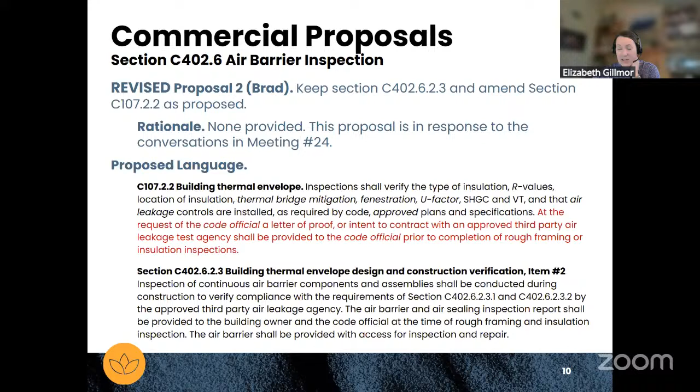Awesome, thanks Kevin. Elizabeth, then Ron. I'll share that Denver's recently instituted a really similar policy. They require two documents to be submitted at permit: one is an actual air barrier review performed by a third party, with specific qualifications set by Denver. The second is a letter that rings very similarly to Brad's suggestion here, signed by the third party, not the architect. So I think Kevin made a great point there. I do like Tim's suggestion that the scope is outlined, which could be really helpful for the contractor in knowing when things have to happen. I know just enough about this to be dangerous, but we do have this service at our company, and what I'm learning from the folks who do that is that timing and coordinating with the contractor during construction is really important. So some of Tim's suggestions about sequencing could be valuable to achieving success with air leakage.

Ron, jump in. I like the idea Tim put forth of having a letter coming from the testing contractor. When I've dealt with this, I've wanted the person or company doing the testing to tell me what they're going to do and confirm they're on the project. The signatures by the building official, owners, architects, and so forth are just acknowledgement that they understand the plan, not that they're taking any responsibility for the work. It demonstrates a level of coordination, that everybody knows what's supposed to happen and what's been told on the permit documents. But it doesn't confer any responsibility to the architect beyond acknowledging they received that letter and know that's the plan.

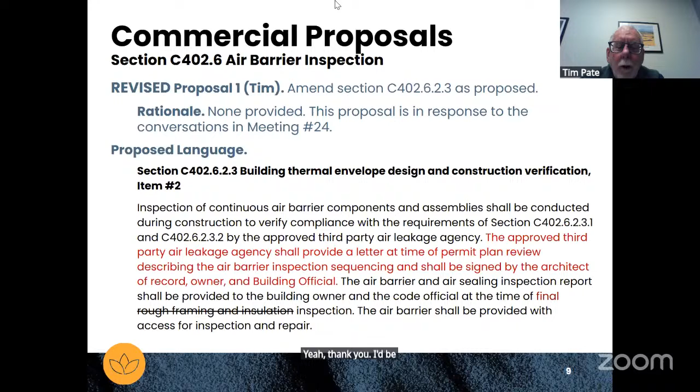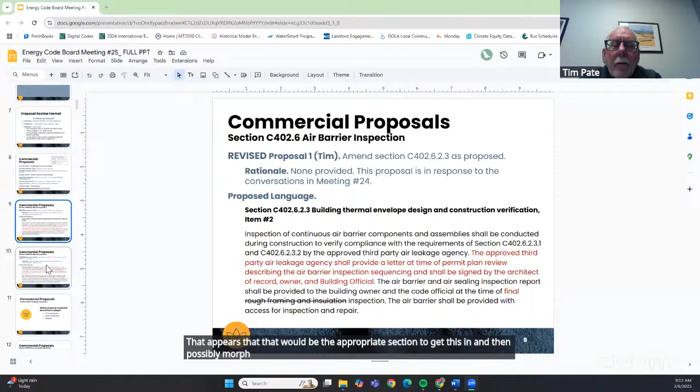Okay, thank you Ron. Tim? Yeah, thank you. I'd be completely open to getting this requirement into the other section as Brad suggested in the chat. That appears to be the appropriate section to get this in, and then possibly morph the two together and see what that looks like, from the beginning through completion of final framing inspections. I'd be open for that. Absolutely, thanks.

Just quickly in response to Ron's comment, we've seen versions of that where we acknowledge it. The thing that usually happens is this third party that's almost never under the architect's contract, so we can't speak to anything that they are doing other than acknowledging that you could make it a requirement for submittal, something else that the contractor and ownership team need to put in. So there's ways around it for sure.

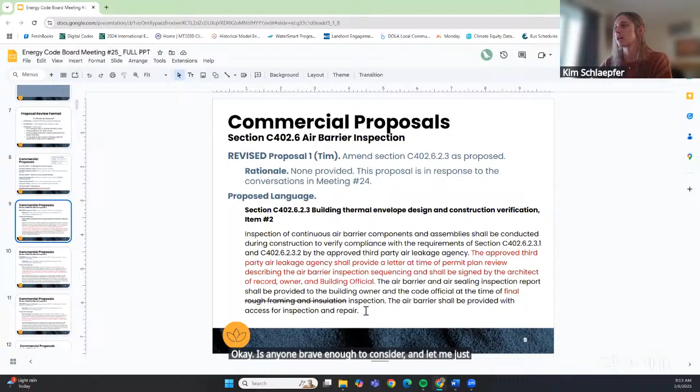Is anyone brave enough to consider... let me just move these two onto the same slide so we could see them together, how this could look. It sounds like, Tim, you'd be okay keeping it within this section, so I'll highlight that yellow to keep it straight. But it sounds like there was interest in taking some of the language from Tim and moving it into that recommendation from Brad. So any board members feeling brave to try to think about how we combine those? I'll let you guys look at it for a second.

If I could just suggest that we don't do that on the fly here, I'd be happy to work with Brad on it, or just do it myself, submit it, and then you could send it around. We can table it and bring it back next time just to make sure. I'd be happy to do that through you guys, Kim, and send in some stuff, and maybe we can have a little back and forth in development of this.

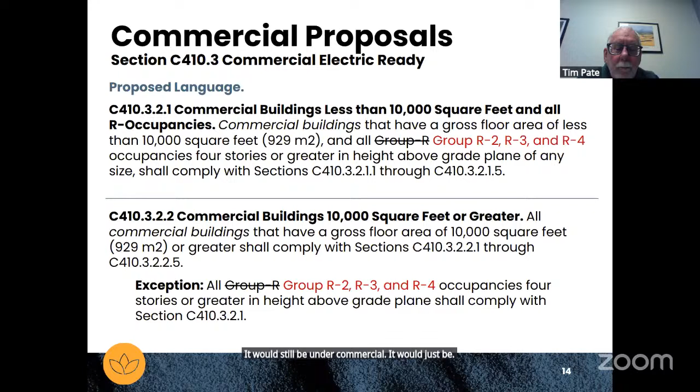Awesome. So any other questions on this? If not, I think, like I said, we may just skip the straw poll because this is just an alignment issue that Carolyn was able to catch. Okay, I'm not seeing any.

Wonderful. For clarity, I should credit public comment on this one. Oh, thanks Carolyn, and thank you to the member of the public who commented. Okay, so with that, we will move on to Carolyn's next proposal. Carolyn, I'll pass it over to you, and your code language is on the next slide. So let me know when you want me to navigate.

Thanks, Carolyn. I'm having trouble unmuting. I had to switch to a mobile device because I was having problems with my computer on Zoom today, so apologies.

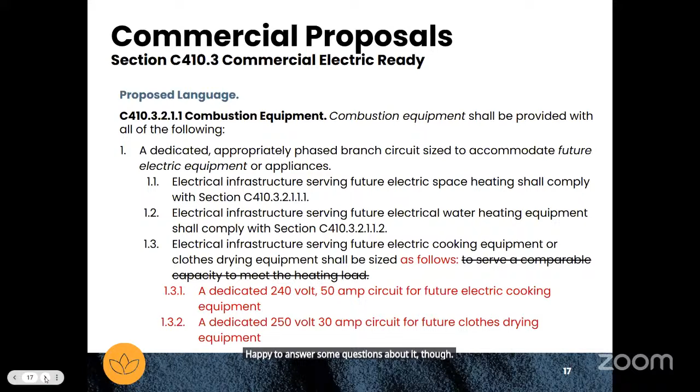For consistency of language, since we received this as a public comment, I thought I would make this proposal. Happy to answer questions about it. So it maintains what we had before around thermal load language for space and water heating, but just specifies dedicated circuitry for future electric equipment replacing gas cooking and clothes drying equipment.

Thanks, Carolyn. I just want to note for board members, this shows up in two different sections of C410: C410.3.2.1.1 and C410.3.2.2.1. So this would be a change made to both sections.

Any board comments, questions, thoughts? John? Yeah, I'm just not sure if that's sufficient for clothes drying in a commercial space, like large equipment. I think this would work in a residential setting, but I'm concerned about this being in the C code.

Thanks, John. Do any board members have thoughts around that? Brad? Yeah, I'm wondering if we could maybe just revise it to a minimum 30 amp circuit, and then the 50 amp circuit for electric cooking, well, commercial could require more, but I thought for typical residential it was smaller. They would typically do like a 40 amp circuit.

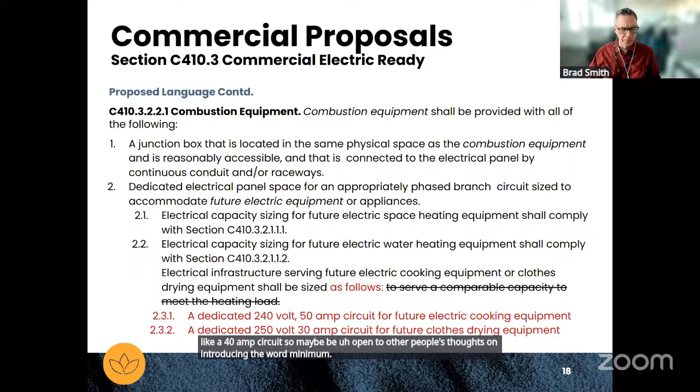So maybe I'd be open to other people's thoughts on introducing the word 'minimum' in there on circuit sizing. And I'd be also fine even taking out the specificity of the voltage and amperage and just saying a dedicated circuit appropriate for the commercial grade replacement. I think the only thing we were trying to move away from is this reference to heating capacity.

That feels like a good particular amendment to make, to be less specific than code. It's just that always has unintended consequences you find out about later.

Okay, thanks all. So it sounds like potential revision to change, to remove the specificity of the voltage and amperage out of this. John, oh, Brad, sorry, I didn't see your hand was raised. Jump in. But that's a lingering hand, sorry.

John, do you think that would address your concern here? Yes, yes, it would. That was my only concern. I operate a jail and I'm used to seeing large equipment like this, and I just didn't want to get too specific. Thanks, John.

So just to clarify, and Zach, I think as our resident electrician, feel free to jump in if you've got any thoughts on this as well. Do we think that this language is enough, or do we want to add language that says something around it needs to serve the commercial cooking?

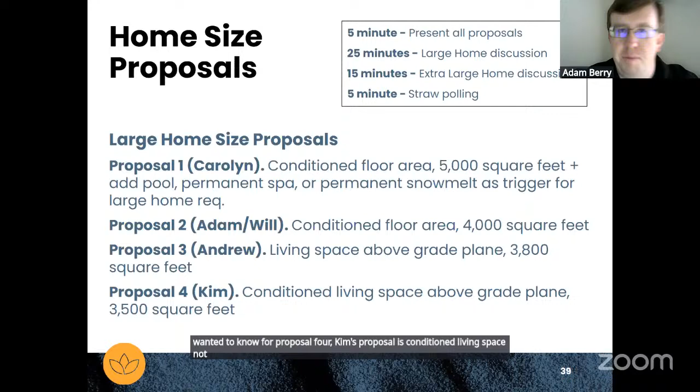I think, sorry, on the slide you were just on, actually. Oh, this one. Sorry, I didn't catch this reviewing, but I wanted to note for proposal 4, Kim's proposal is conditioned living space, not living space above grade plane. We didn't catch that typo. Sorry, Kim. Oh, correct. Thank you. I was just noticing that myself. Thanks, guys, I'll make that change right now.

Okay, so we're going to go through these proposals one at a time. And I was going to say I might do it if—okay, just cut this. Oh, man, my computer today is moving slow.

So we'll go through these one at a time. We'll give every board member a minute to share their proposal. And then, rather than vote on each individual proposal, we've come up with a number of questions that we'll get to, like what metric do we want, what's the square footage threshold. So pulling out the detail from all these various proposals, we'll walk through those together as a group after the board members share their proposals. Starting with Carolyn, and then we'll go to Adam. I'll pass it over to you.

Great, thank you, and I'm back on my computer, so yay. I'll start by saying we heard a lot of comments in public hearing, and it was also inherent in our discussion around the complexities of this triggering additional requirements threshold—when we cross the threshold where the outcome is that we're prescribing additional efficiency requirements on the home being constructed. I agree with the concept that where a home represents a disproportionate use of energy, it's appropriate for us to apply more stringent requirements.

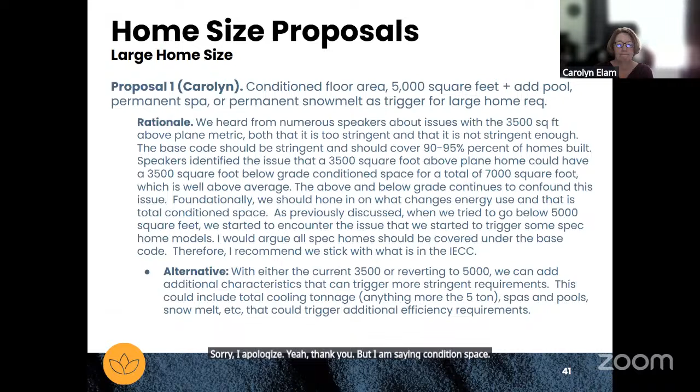So I think a lot of the reasoning was very similar behind the CEO's proposal on this one as Carolyn's. We heard very consistently in public comment from many commenters—not all, but many—that it's important when considering floor area that we're considering all the area that can use energy. Conditioned floor area is the area that uses energy; whether it's above grade or below grade does not determine whether or not that area uses energy.

I think we proposed 4,000 square feet largely due to a comment submitted by a public commenter, which noted that based on the database they were using for home size, approximately 7% of Colorado's homes are 4,000 square feet or larger. To Carolyn's point about being within that 90 to 95% range on that standard deviation, we felt 4,000 square feet fit right in, given that 7% would mean 93% of homes in Colorado are smaller than that.

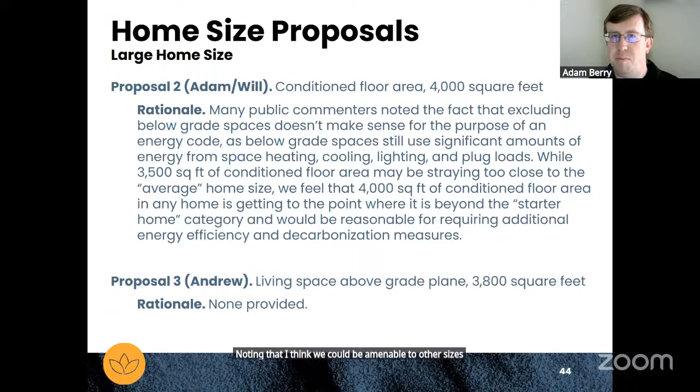So that's where the 4,000 square foot number came from, noting that I think we could be amenable to other sizes, but that's just where our proposed number of 4,000 came from. So thank you.

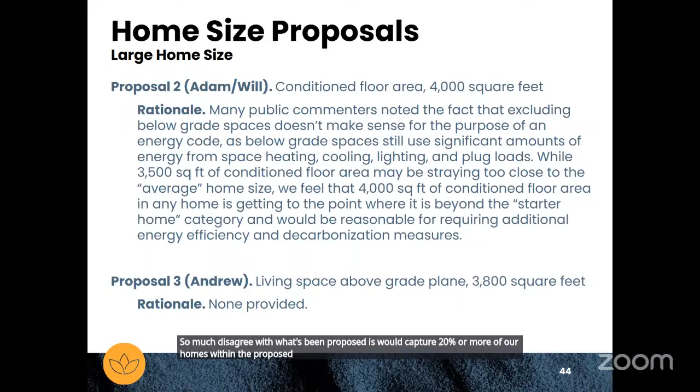Some of the additional proposals take us backwards based upon our own data. If the intent is to cover 95% of all homes, or production homes, as being within the medium classification—upon my own review of our own data, I proposed an amount that I think is consistent with that, being what I would say is one of the two largest builders in the state. I so much disagree with what's been proposed, as it would capture 20% or more of our homes within the proposed definitions. And I am so against that as being even proposed. Thank you.

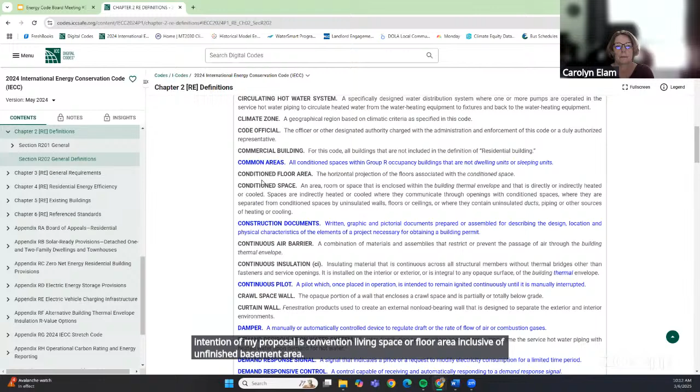I think it depends on whether it's finished or unfinished, Elizabeth. I don't think an unfinished basement would qualify as living space under the definition, whereas it would qualify under conditioned floor area. My intent would be to include unfinished basements in what I'm advocating for as the square footage we use. So does that mean living space would not? Well, I think we need to get honed in on what the right language is. I agree with that. I'm just clarifying the intention of my proposal is conditioned living space or floor area inclusive of unfinished basement area. Yeah, I think it's pretty clear in the definition of living space in the IECC that it would not account for unfinished spaces. It's space within a dwelling unit utilized for living, sleeping, eating, cooking, bathing, washing, and sanitation purposes. Got it. So if the basement is unfinished, it does not count as living space. As soon as it becomes finished, it counts as living space. Is that correct? So basically, if it gets past CO unfinished and then gets finished later, that floor area would not be accounted for in the home size consideration for the code. If you used conditioned floor area, it would be.

Got it. Okay, so we may also want to, and maybe the code already does this, but just define what is the threshold between finished and not finished. Is it drywall? Is it a furnace that conditions it? If you could help me with that, that may already be here and I'm just not aware of what it is.

Thanks. Kim, could you do me a favor and just pull up the conditioned space definition? I saw you scroll past it a couple of times. Right there.

I will keep this up, and Ron, I'll pass it to you. I think maybe we're getting to it.

I was just going to point out that we're using these words interchangeably, and it's a little confusing because I don't think they all mean the same thing: conditioned floor area, conditioned space, and occupiable space, and so forth. I think we're getting there looking at the definitions themselves, but we're in danger of making things muddled by throwing those terms around without being more precise about which ones we actually mean.

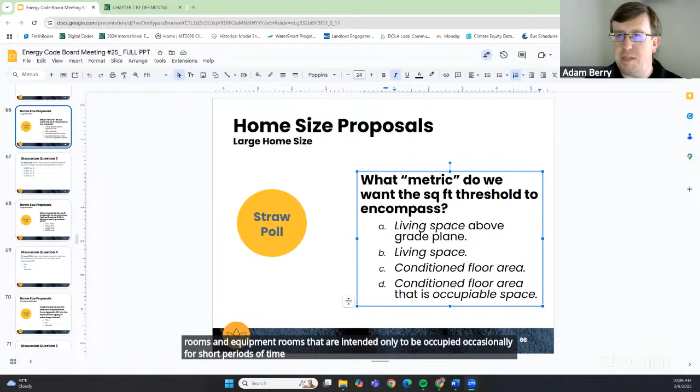But occupiable space is defined as an enclosed space intended for human activities, excluding those spaces intended primarily for other purposes, such as storage rooms and equipment rooms that are intended only to be occupied occasionally for short periods of time. So I would think an unfinished basement area that is a large space that could be finished would be considered intended for human activities.

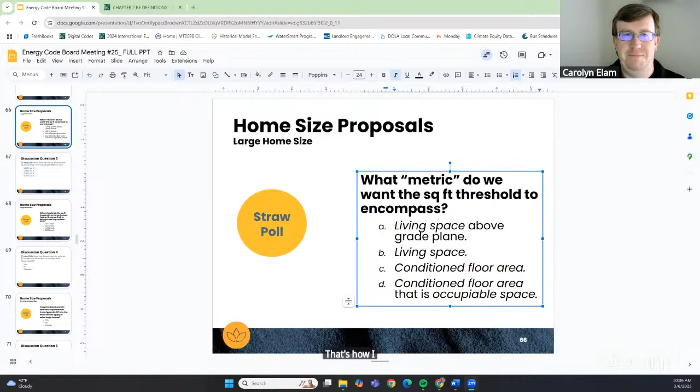That's how I would read it. Okay Tim, are you offering up another metric to vote on here?

I put my comment into the chat about the occupiable space definition, with an example: if you had an unfinished basement with mechanical equipment and racking for storage, it still has a lot of heating vents, and the manual J includes that area. If you use occupiable space, that would not be included. I don't think that's really where the board's trying to go.

In my opinion, I think it's going to go the opposite way. I know there are 3 or 4 definitions we're trying to put together, but conditioned floor area - I don't think you'd call a conditioned attic a floor area in the building code, nor would a conditioned crawl space be floor area. Conditioned floor area, I think I could find a code section that says that's like first, second floor, basement - that would be the floor area.

So I guess to try to resolve this, I wonder if we can go one by one with all 4 of these and explain what, at least from my perspective, each option means, so everyone can understand the options on the table. So living space above grade plane is living space as the defined term, which is a space that is essentially finished and meant for living - cooking, bathing, eating, and the other items listed there.

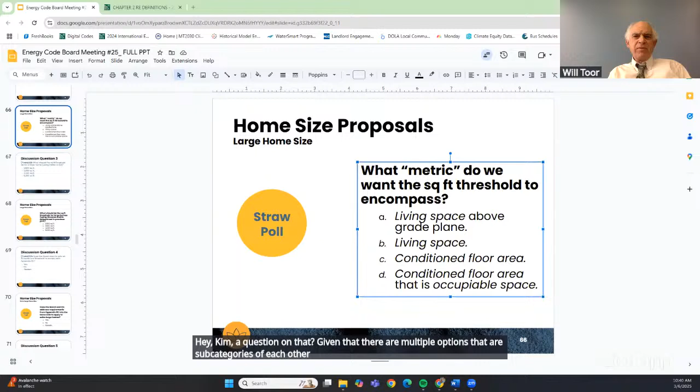Hey Kim, a question on that - given that there are multiple options that are subcategories of each other, I'm not sure that completely works. Yeah, I think what we discussed is if we don't get a majority on any, then the two top options will be moved to a vote, that one will be voted on, and that's how it gets decided. Okay, thank you Adam, for clarifying that.

Could we first vote whether to retain the above grade plane versus modifying it to something inclusive of additional space, and then vote on which definition if changing to the broader space is adopted? It's less complex than picking all 4 things. Carolyn, I'd say if folks want to retain living space above grade plane, vote for that rather than breaking it into 2 votes. I think the other 3 options are competing with just keeping the above grade plane definition we have.

Yeah, I'd like a yes/no on the first one first. We can do that. I just want to encourage us to be expeditious as we move through this. The more time we spend here, the less time we'll have for every other board member's proposal on the code itself. So we will vote first on whether the board wants to retain living space above grade plane as the metric.

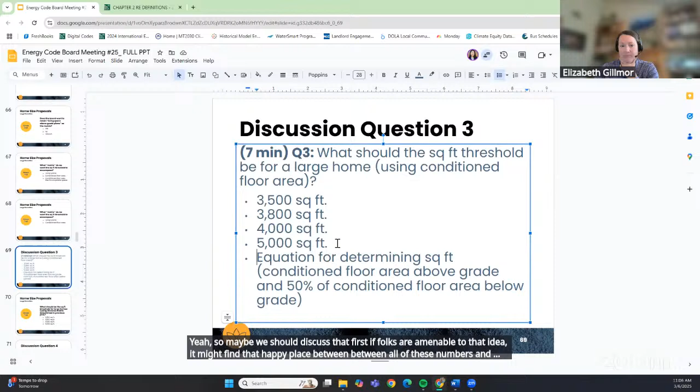If folks are amenable to that idea, it might find that happy place between all of these numbers and then help us decide. So the first question, Kim, is adopt Elizabeth's equation or not. Then if we do, Elizabeth, I'm sorry to do this, but we're holding you to that equation at this point — it's not just any equation. That equation is 100% of above grade plus 50% of below grade conditioned floor area. Yes or no on that. If yes, then you decide what that equation yields — how many square feet of conditioned floor area based on that equation. If the board rejects that, then the question is just conditioned floor area in total. Does that make sense to everybody?

Not seeing any confusion. Will or Andrew, I don't know if you were going to raise confusion on that.

No, Adam — Andrew, I raised one question, which I think is somewhat on record: at least in the proposal, Caroline's really the only one giving something more tangible, where the intent was that 95% of homes offered wouldn't be captured by this. And while I may disagree with why we're here, I at least agree with her intent. I didn't know if that's a question itself — what is the board's intent? A couple people have talked about that, but nobody's really said objectively what that intent may be. Andrew, I don't think any member of this board can speak for what the intent of the board is. Any member can speak to their own intent, and I think you need to vote on these decisions based on what your intent is. That's all we can ask of any board member — to vote based on your own intent as a board member. We're not going to go around and ask every one of these 21 board members to explain their intent; we don't have time for that. So that's all I can offer you.

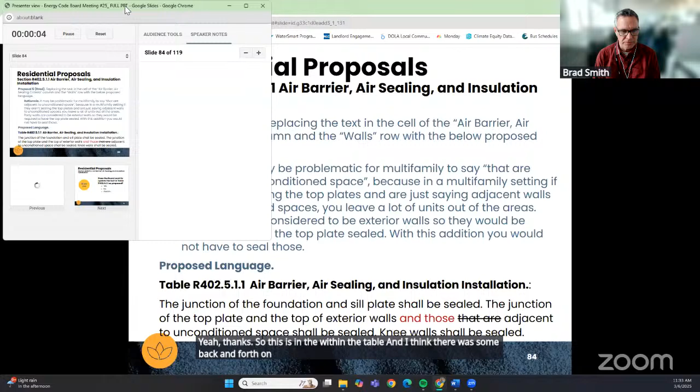Yeah, thanks. So this is within the table, and I think there was some back and forth on this with some of the code consultants. The concern was on some of the multi-family properties, as you can see in the rationale, that even the common walls between units were considered exterior walls. So the intent behind this is just to provide additional clarification on any wall, not sometimes I think the code can be understood as a perimeter or an exterior wall on the outside, let's say, of the floor area or of a home. And the intent is that any wall, even an interior wall that would be adjacent to an attic, should still have air sealing between the top plate of that wall and the unconditioned attic space.

So the addition of 'and those' is to clarify any concern that a multifamily common wall from one unit to the next is considered an exterior wall. Hopefully that is a decent explanation, but I think the rationale, if folks can read it, is a good explanation.

Thanks, Brad. We'll go to board questions, comments. Elizabeth: Yeah, I like the intent here because I think this helps set up for success for when you have to do unitary testing. But I don't know that where that would be defined that a party wall counts as an exterior wall. Is that something that we could point to? I would think that a wall between two conditioned spaces does not count as an exterior wall.

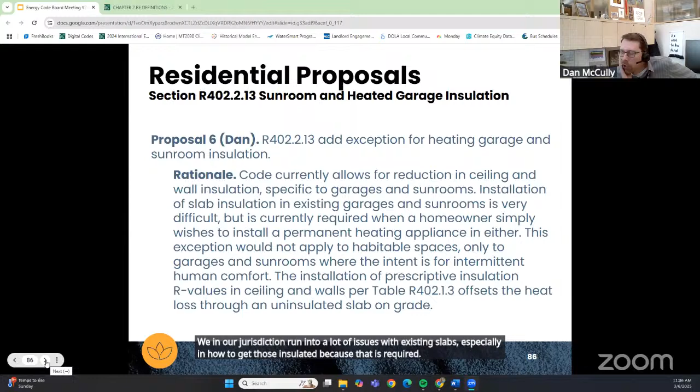Dan, you had the next proposal, so I will pass it over to you to share your thoughts. Thank you. Yeah, my proposal is, since the code allows for reduced ceiling and wall insulation for garages and sunrooms, we in our jurisdiction run into a lot of issues with existing slabs, especially, and how to get those insulated, because that is required. So my proposal would be to actually exempt the slab insulation if they opt to use the prescriptive R values from table 402.1.3.

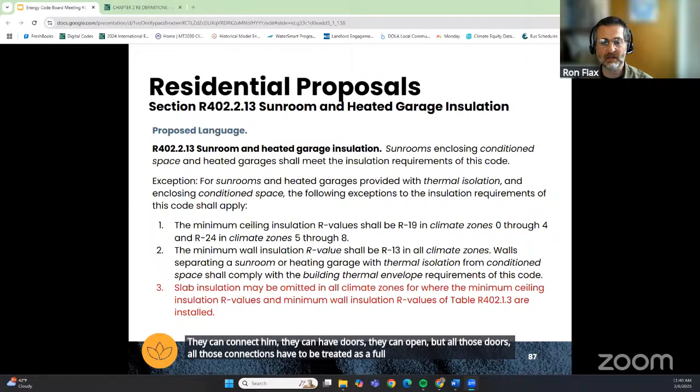Ron: In Boulder County, we've had a lot of sunrooms, and what we find when I look at the energy modeling that sometimes accompanies them is that they have huge nighttime losses because they have so much glazing. When they're connected to conditioned space, either indirectly or directly, there are huge energy penalties for the home. So we've ended up in a situation where we don't create any allowances for sunrooms, and people have been building them as separate thermally isolated structures that aren't heated. We maintain the thermal boundary to the house; they can connect them with doors that open, but all those connections have to be treated as a full exterior wall, because there's so much thermal loss through the glazing. The slab insulation, I think, would be the same thing, that there would be significant losses through that slab, and pretty problematic from an energy point of view.

Okay, thanks, Ron. Any other thoughts before we move to a vote? Brad, then Tim. One last comment to provide some context: about 8 inches thick concrete has a thermal value of less than R1. So, to Ron's point, there are potential significant losses even through just the slab alone.

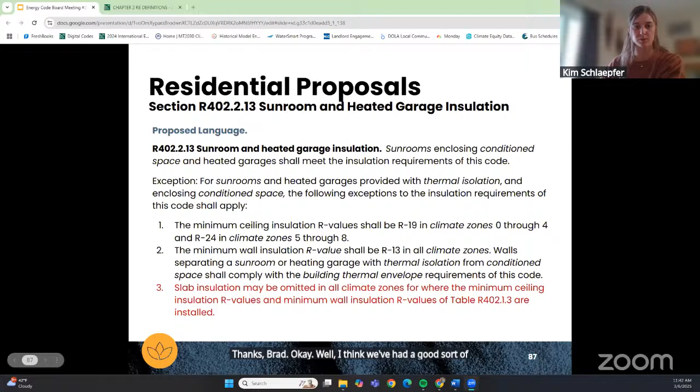Thanks, Brad. Okay, I think we've heard a good summary of board comments on this proposal, so let's move to a vote. Does the board want to update section R402.2.13 as proposed? If you'd like to vote yes to accept this proposal, please raise your hand now.

Okay, I got 13 hands for A. Thank you, you can lower your hands. If you would not like to accept this proposal, please raise your hand now, option B. Sorry, I don't know if you counted me on the first one, I think my hand was lingering. I think I saw your hand go down, Brad. I was checking on it. Thank you. Okay, so three votes for option B, no. Thank you, and any board members who would like to abstain, please raise your hand. Okay, that's two abstentions. So thank you, Dan, for this proposal. That proposal passes.

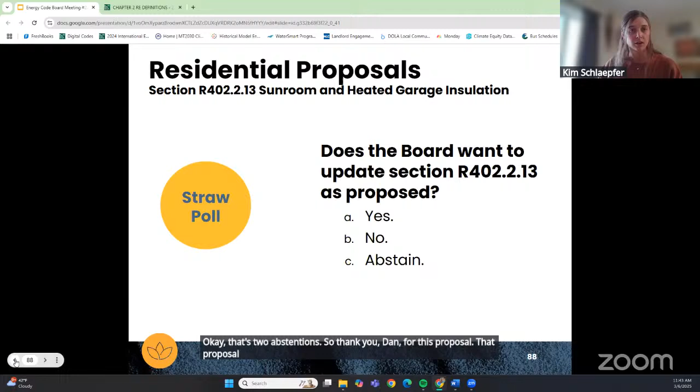All right, so we're going to swoop back to this first one. Anna, I will go to you to hopefully share what you found. I think I'm going to make it more complicated, so sorry in advance.

So in my research here, I do find the definition where party walls are located, in section 706.1.1, party walls.

It talks through how they are required to be constructed as a firewall, which requires sealing at the top. Firewalls are required within townhomes, separation between townhouses, between homes that have 2 dwelling units. Then fire partitions are required in multifamily units. So it's technically not a firewall.

Ron is smiling and laughing at me, so I don't know if I'm saying something incorrect. Jump in here, Ron. But what I've learned is essentially all of these fire partitions, firewalls, a fire partition is still required to be sealed at the top and the bottom to reduce the spread of fire. But it is not structural like a firewall or a party wall would be.

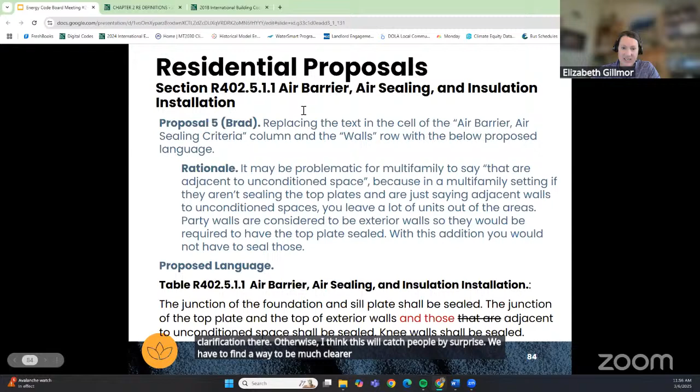Adjacent or abut unconditioned space. Abutting, I like the word abutting. Yeah, when I think adjacent, I'm picturing the full wall, the plane of the wall, not necessarily the linear top of the wall. Even abutting sort of tells me next to. I think I'd seek clarification there. Otherwise, I think this will catch people by surprise. We have to find a way to be much clearer about your intent here, because that just took me 10 minutes to understand it with you sitting right here explaining it.

Okay, Brad, do you? Yeah, I just defer to some of the code officials on the call and whatever they may interpret that as, if they have some suggestions.

Okay, we have 3 minutes left. It would be really cool if we could resolve this before we leave the meeting, but I understand if that's not feasible today. Brad, would you feel comfortable changing adjacent to abut? Is that the main thing we want to make sure is clarified in this language? Would anybody oppose that? I don't know if that really captures it. I'm not sure someone reading this will still understand what that means.

Okay, so maybe what I'll recommend is, reminding the board that we have a chance to figure this out in draft 2, sit with this language a bit longer. I apologize that we planned for this proposal on a day when Hope wasn't here, and she was the one with the major flag on this, so I want to recognize that. Do we feel comfortable doing a quick vote on this, remembering we can change it if needed in the final draft?

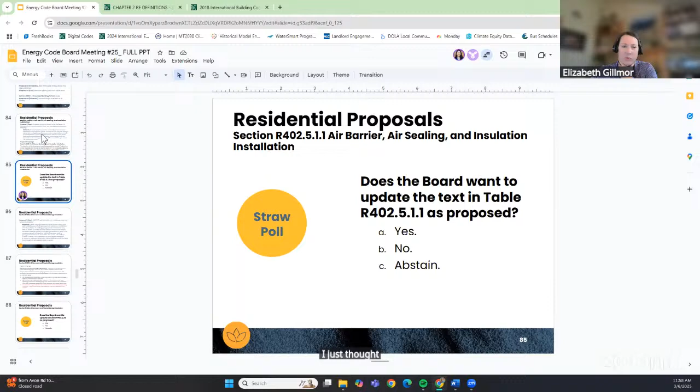I just thought of something. Could we add the words 'interior walls that abut unconditioned spaces'? I think that might flag the conditions Brad is trying to address. Instead of saying 'and those,' could you say 'and interior walls that are adjacent to unconditioned space or abut unconditioned space'? I think that might help highlight that. Does that make sense, Brad? I don't have an issue with that.

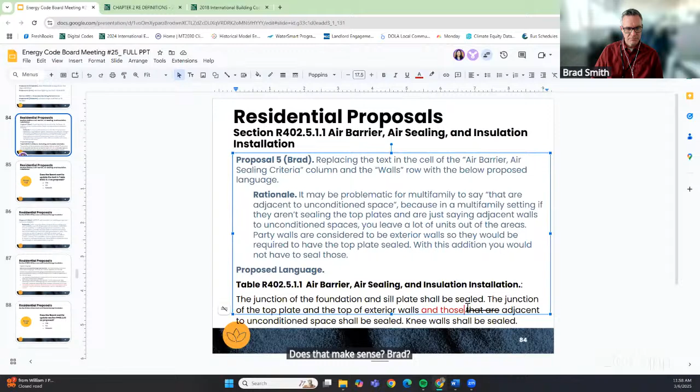Okay, I think it's 'that are,' so 'and interior walls that are adjacent to or abut unconditioned space,' correct? So Kim, you can unstrike that 'are.' Say after two, say 'adjacent or abut.' Is that how you spell abut? That's right, yeah, one of those weird words. It's telling me it's wrong, but I think it's okay. Spelling issues aside.

It doesn't love that word, but that's okay. Can we vote? Are folks okay with that change? Okay, it is now 12, so we're going to do the quickest vote we've ever done. If you would like to update this text according to Brad's proposal as we just revised it, please raise your hand. Okay, 15 hands, yes, thank you. You can lower your hands. If you would like to vote no, please raise your hand. Tim, is that a lingering hand? Thank you, okay, one vote for no. Thank you, Andrew. Anyone who would like to abstain, please raise your hand. Okay, one abstention. So this passes.